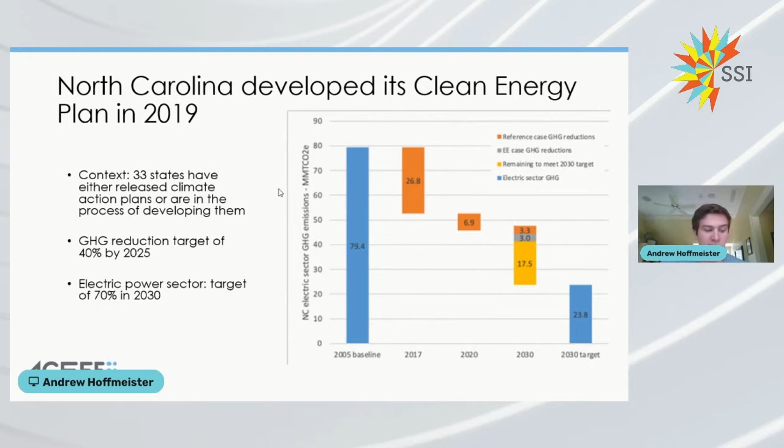So improving energy efficiency in industry is an essential way to advance decarbonization, reduce electricity demand, and provide cost savings to integral parts of state economies. And this is especially important, I'll note, in light of the relatively cheap cost of saved energy in the industrial and commercial sectors and the energy intensity of those sectors. North Carolina industrial customers were responsible for over 27,000 gigawatt hours, or about 20% of North Carolina's electricity consumption in 2018. And those numbers are represented here in Figure 2.

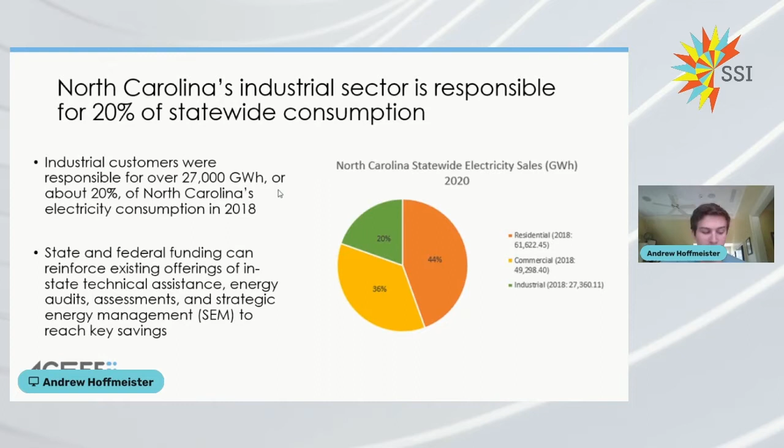Using state and federal funding to leverage existing programs and to reinforce existing offerings of technical assistance, energy audits, assessments, and energy management is essential in maximizing the potential of industrial savings in terms of helping North Carolina and other states reach their climate goals.

So North Carolina utilizes several university, government, and nonprofit programs to provide energy assessments and technical assistance to the industrial sector right now. This includes the Local Industrial Assessment Center, or IAC, at North Carolina State University, nonprofits such as Advanced Energy, and governmental entities, including Waste Reduction Partners and the North Carolina Clean Technology Center.

So the DOE-funded IAC performs energy use assessments for industrial customers and are critical to expanding industrial EE. These centers and their assessments provide industry-specific expertise and help to create a knowledgeable workforce for industrial transitions. They connect small and medium customers with energy savings opportunities, as well as quantify potential energy and cost savings.

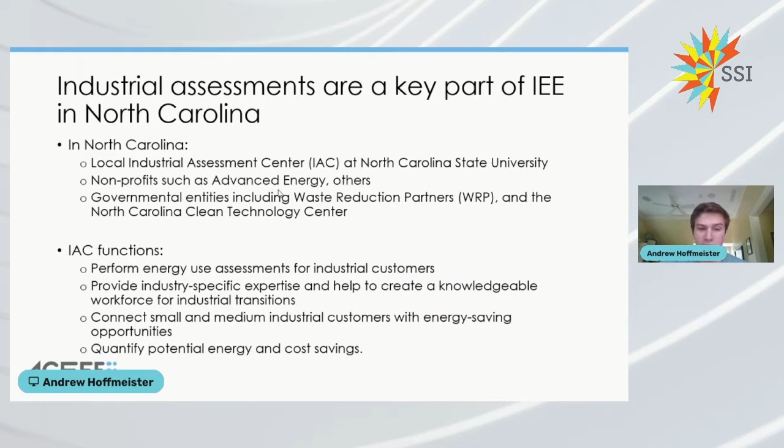So there are opportunities to leverage those benefits of industrial energy assessments through additional state and federal funding on top of the funding that the Department of Energy already provides. So in that state assessment, we calculated that industrial assessments in North Carolina can save over 200 gigawatt hours of electricity in 2040. Since 1992, the NC State IAC has conducted over 500 assessments, implementing over 1,800 voluntary energy efficiency measures and saving almost $25 million.

Since 2012, about 67 recommendations have been implemented each year, with average savings of 124 megawatt hours per recommendation. So along with the other sources of energy assessments, those continuing existing efforts from those other sources would result in about 36 gigawatt hours of savings in 2030 and about 50 gigawatt hours of savings in 2040.

So if North Carolina were to double the current IAC funding, we found that the number of implemented recommendations and resultant savings could also double, reaching 100,000 megawatt hours of savings in 2040. So combined with those existing efforts above, it's possible to reach savings of 176 gigawatt hours in 2030 and 208 gigawatt hours in 2040, or 0.1% of the total electricity load in 2040.

So the NC State IAC could also deliver significant peak savings by helping industrial customers change rate schedules, reduce loads, and shift plant operational schedules. Also, there's the potential for further savings through a new IAC at another major engineering university in North Carolina or nearby, and complementary policies that would operate to reduce industrial energy consumption include support for smart manufacturing and intelligent efficiency,

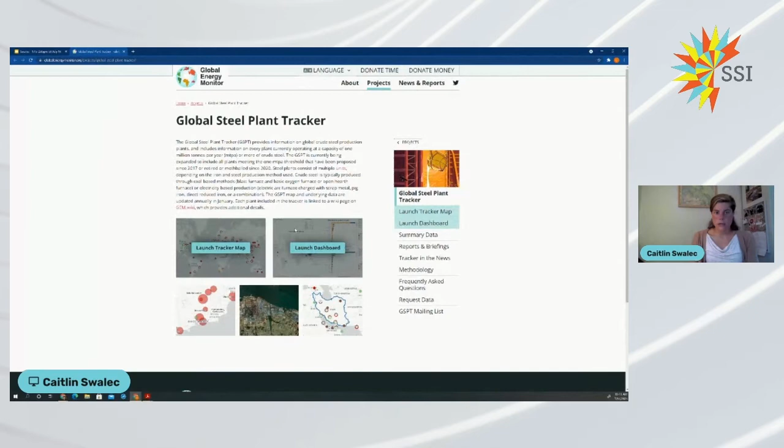So first, we have our online interface, which I'd like to just show quickly. There's two parts here. We have a dashboard that shows some data visualization and a tracker map that has all of the plants located.

And in this capacity view, you can really quickly see some major trends in steel production. And I'll be getting into steel making and why this is relevant in just a moment. The few things to pull out here are, a huge concentration of steel production in China, mostly the blast furnace, basic oxygen furnace route, and that electric arc furnace steelmaking is the predominant form in the US.

So the other pieces of the tracker, we also have a wiki page for each steel plant, which provides background information on the plant. It also provides a lot of detailed information that comes from our underlying database, which is the third piece of the tracker.

And we currently provide data on location, ownership status, or operating status, the capacity and production of the steel plant, the steelmaking process, and then some details on the furnace units at the plant.

And then we have additional data that we don't, it's not quite complete, so we don't release it publicly yet, but it includes information on steel products, sector end users, such as oil and gas, raw material sources, and then we're looking to expand the tracker by including more innovative, low-emission steelmaking projects, workforce data, and information on emissions.

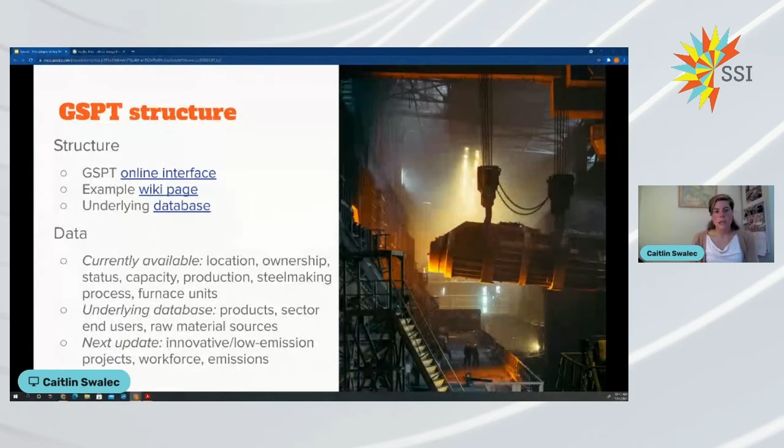So when you're looking at emissions from the steel industry, it really depends on the process. There are three main production routes for steel making, and I'm going to go over these briefly because it's important context for the rest of this discussion.

The first route is the blast furnace basic oxygen furnace steelmaking route. The raw materials are coking coal and iron ore, plus some other things. The coal and iron ore go into the blast furnace unit, or BF, for the iron making phase, creating pig iron—the most emissions intense part of the process. From the blast furnace, the pig iron goes into a basic oxygen furnace where it's made into crude steel. Overall, emissions for this route are approximately 2.2 tons of CO2 per ton of steel.

The next route is direct reduced iron electric arc furnace steelmaking, or DRI-EAF. An important distinction here is that the raw materials are iron ore plus some other things, but you don't have metallurgical coal. That coal creates process emissions in the BF-BOF route, which makes it really hard to decarbonize. BF-BOF is the most common steelmaking method right now—about two thirds of global production uses it.

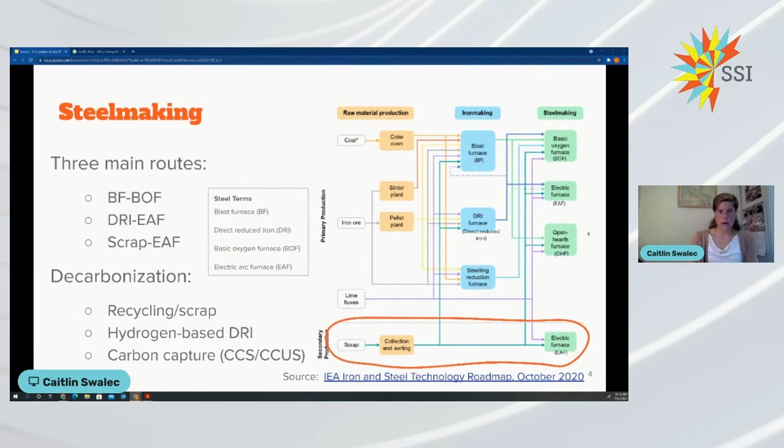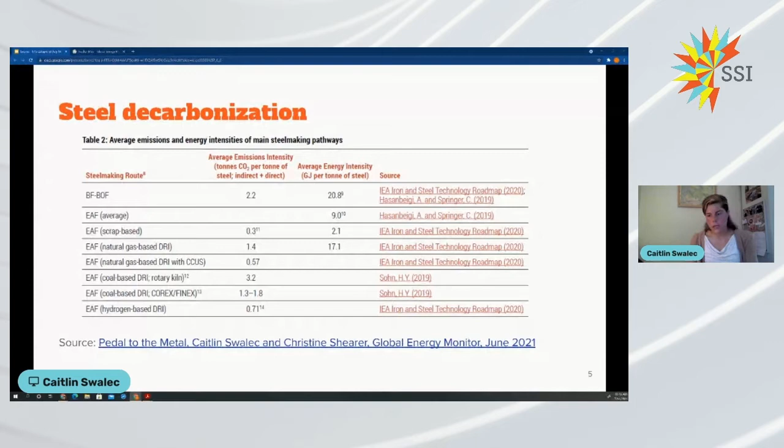So again, here's a table of the emissions intensities for steel production. I just want to emphasize again, most steel right now is made by the blast furnace basic oxygen furnace route. And then the electric arc furnace routes tend to be lower emissions unless you're looking at the coal-based.

So why do we care about this? Well, steel is responsible for 11% of global carbon emissions and 7% of global greenhouse gas emissions. Multiple reports have come out recently showing the pathway that the steel industry could take to reach mid-century net zero targets. And whichever group you're looking at that has come out with these pathways, what's clear is that the steel industry needs to make a shift from how they're currently operating to achieve any of these goals.

And the way that that's going to happen is switching away from the blast furnace basic oxygen furnace steelmaking route, using more of these innovative low emissions technologies like the hydrogen-based DRI and carbon capture storage, increasing scrap recycling, and material efficiency, so smarter design in steel.

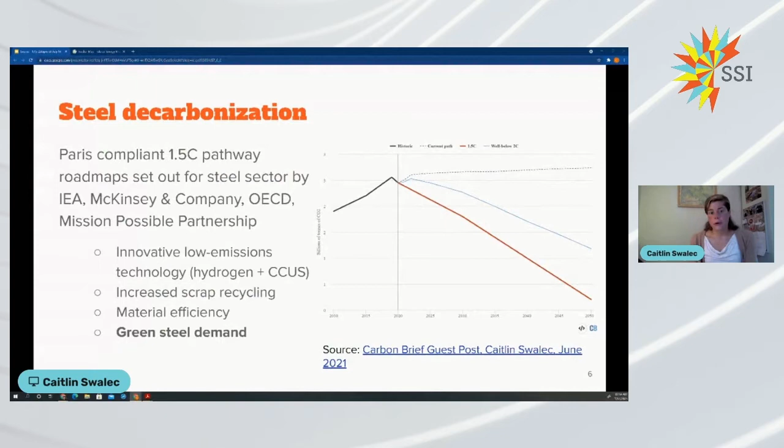And then this transition is going to be driven by green steel demand. Steel plants aren't operating with huge margins of profit, so in order to be making investment decisions to move towards lower emissions steelmaking, there needs to be green steel demand that shows these steel manufacturers that folks will be purchasing this lower emissions steel.

And that's where sectors like the oil and gas industry can come in. So oil and gas infrastructure, steel pipelines are the main material used in gas transmission networks. Crude oil, acidic bearing fluids, and the other petroleum products used in oil and gas are really corrosive and create a lot of thermal stress and structural stress on pipelines. So you need a really strong material like steel.

Although stainless steel is more resistant to corrosion than carbon steel, it's also much more expensive. So carbon steel is the main material used. Now the pipeline market is set to grow by about 6% annually from 2021 to 2026. We are seeing more pressure to move away from oil and gas, so that could change, but I think it's clear that there's a lot of projects in development. I'm going to go through a little bit of that in a moment.

And then there's also a lot of cases where oil and gas pipelines are being repurposed for other uses, for example, the new hydrogen economy. We have over 1,000 kilometers of pipelines being used for hydrogen in the US. In the EU, there's a lot of projects going on to convert oil and gas pipelines for hydrogen transport. They're predicting 23,000 kilometers of pipeline being used for hydrogen by 2040, and about 3/4 of that is repurposed natural gas pipelines. So whatever's happening with the oil and gas infrastructure, we know that pipelines are being built, and that steel demand is coming through.

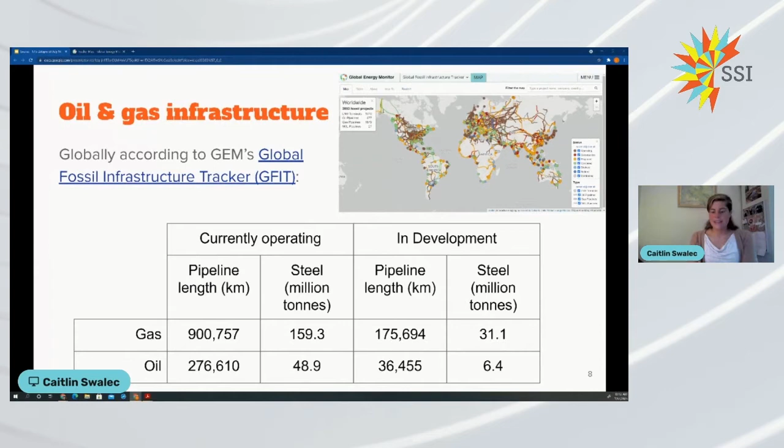According to our infrastructure tracker for oil and gas, we know that there's about 1 million kilometers of gas pipeline currently operating and about 250,000 kilometers of oil pipeline currently operating, and then over 200,000 kilometers of oil and gas pipeline in development right now. And using some standard characteristics of pipeline, that equates to around 37 million tons of steel that will be demanded for these pipelines.

So that's a pretty big amount of steel that could be sourced with conventional methods, or it could be sourced with green steel. So last fall, the World Pipelines Report, which is a technical magazine supporting the oil and gas industry, made this call for the oil and gas industry to support the transition to a low carbon economy by sourcing oil and gas pipelines from carbon neutral steel producers, which is a pretty big call to action for the oil and gas industry and led to a lot of questions for us.

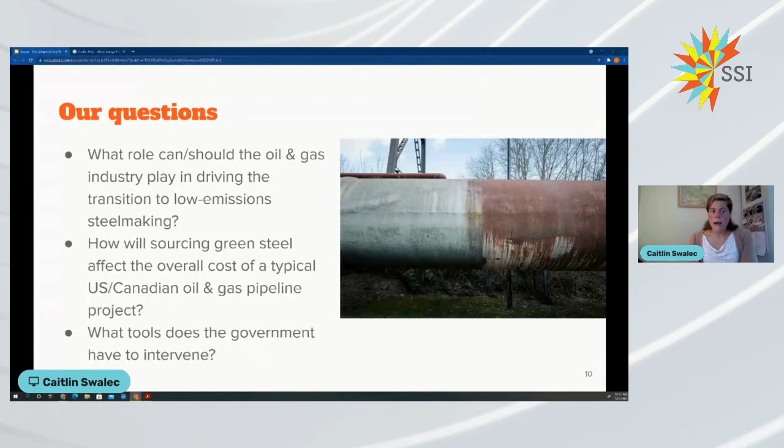Initially you might say this seems like a moonshot, but the IEA Net Zero 2050 report found that oil and gas companies are responding to pressure to invest in clean energy. So I think there's also an opportunity to pressure them to invest in green materials and see them respond. So the main questions we had coming from this report and the status of oil and gas infrastructure are: what role can and should the oil and gas industry play in driving the transition to low emission steelmaking? How will sourcing green steel affect the overall cost of a typical US or Canadian oil and gas pipeline project? And then what tools does the government have to intervene and help support this transition?

So I just want to take a moment first to talk about green steel demand. We know that low emission steel production is essential to meet mid-century climate targets. Embodied carbon emissions are being identified and valued through mechanisms like carbon border taxes and policy levers.

So demand signals from steel buyers are needed to drive the green steel transition. Steel buyers need to cover the green steel premium to drive manufacturers' investment decisions, because steel manufacturers need to know that buyers are committed to buying large quantities of green steel for the long term. And this is important because, as I said before, these low emission steelmaking technologies haven't reached commercial scale yet, but they're set to in the next 5 to 10 years.

And at the same time, steel plants are facing these reinvestment cycles, and most steel plants are going to be making decisions about whether to prolong the units they currently have operating or to replace them with lower emissions steel manufacturing units in the next 5 to 10 years also. So the oil and gas industry could help create this green steel demand, signaling to steel manufacturers that interest and investment in green steel is serious. And that could help drive a big transition in the steelmaking technology currently used.

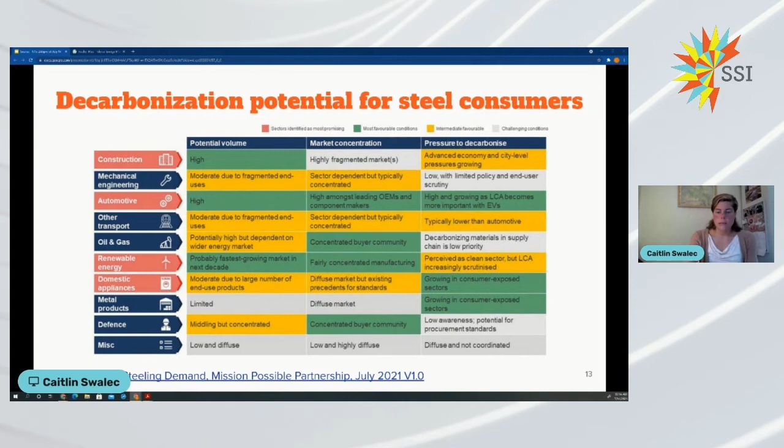Now, we did a little case study looking at the cost that sourcing 100% green steel would add to a typical pipeline project. Using some standard characteristics of steel pipelines used in oil and gas projects, we found that the total cost increase to a pipeline is around 7.5%, or about $75,000 per kilometer. And the carbon dioxide savings for that switch, if you're looking at blast furnace, basic oxygen furnace steel to green steel, would be around 276 tons of carbon per kilometer of pipeline. And the cost of that is about $272 per ton of carbon.

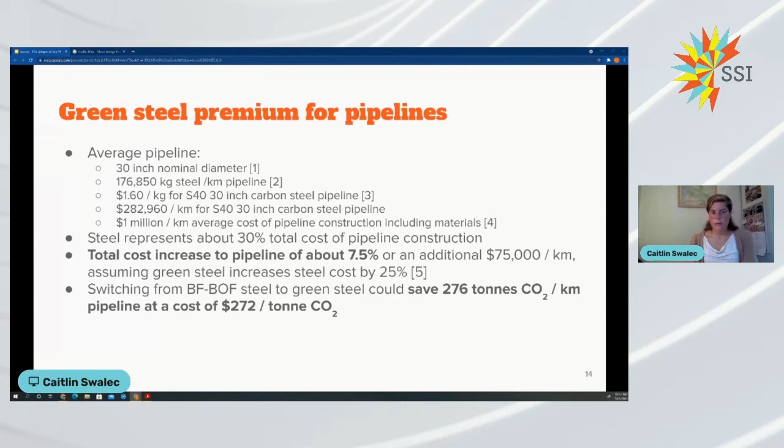So what does that tell us? It means that oil and gas is not going to be making this transition to purchasing green steel on their own. The economic incentive isn't there based on what we see in carbon pricing. So this wasn't an overall shocking result for us, but we still were thinking about ways that the government might be able to get involved and help drive that transition. And there's quite a few options.

One would be to consider embodied emissions in pipeline applications. There's also the potential of using green public procurement policies for state-owned oil and gas pipeline projects. Of course, that's not super relevant for the US or Canada, but there are places where that could make a big difference. There's also the option of setting Scope 3 emission standards under the American Petroleum Institute standards that are used for sizing and safety criteria for pipelines. And then I think there's also a big potential for phasing out oil and gas pipelines by requiring repairs and remanufacturing of corroded steel pipes rather than replacement. So that's really working under the material efficiency umbrella and lowering steel demand.

I also wanted to give this example plant in Canada. It's a blast furnace basic oxygen furnace facility with about 3 million tons of crude steel capacity per annum. This plant primarily produces large diameter pipes for the oil and gas industry. And they recently received around 16 million Canadian dollars from Canada's Strategic Innovation Fund to upgrade the facility. So that was a huge investment in this steel plant, but really an investment in the oil and gas industry. And this money is currently being used to make some improvements to the plant.

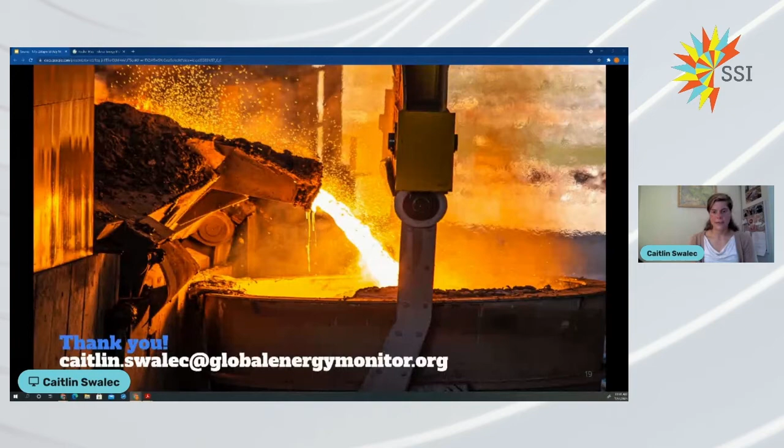We're going to move on to our final presenters. We have two presenters talking to you a little bit about the Shakespearean dilemma of to co-digest or not to co-digest. That is the question of the hour. A little bit about Sabarish Vinod and Kyle Crete.

Sabarish is a director of new product and services at Lincus Inc., where he leads their expansion into new markets and in the design of new offerings. His focus is on driving development of solutions that break down barriers to customer participation in energy efficiency programs. He has provided technical and policy support for energy efficiency and demand response programs as a subject matter expert on complex technologies and system optimizations.

Sabarish has a patent pending on the remote pump monitoring device for oil and water pumps. He holds a bachelor's degree in mechanical engineering from University of Calicut in India, and a master's degree in mechanical engineering from the University of Michigan, Ann Arbor. Kyle is a project manager for the Energy Coalition and is also a mechanical engineer from Cal Poly SLO.

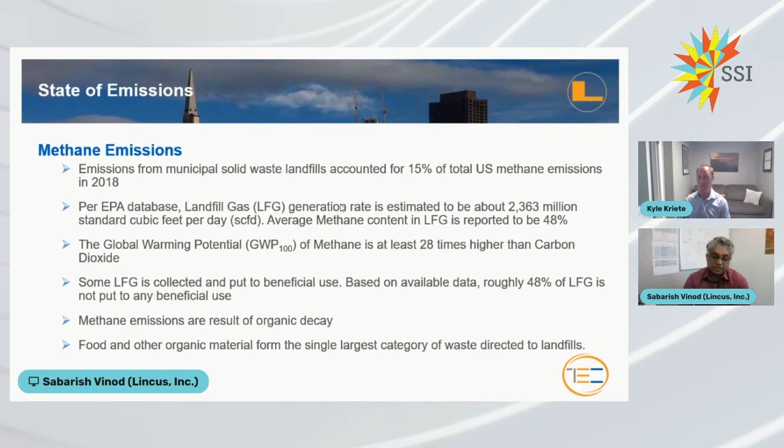And going into the next slide, food and other organic material form the single largest category of waste directed to landfills. So to sum this up, there's a lot of methane that is being generated in landfills. A good portion of that is not being put to any beneficial use. And that methane is the result of organic decay, which comes from organic food and organic material that is being sent to landfills. So what does that look like, right? So how do we characterize this waste?

So organic waste accounted for 24% of all municipal solid waste that was sent to landfills. And industrial, commercial, and institutional customers accounted for more than 75% of this waste generation. This is important to consider because when you have a concentrated group of customers sending this type of waste into a landfill, that means there is an easily addressable problem where you're able to figure out how do we collect this organic waste, how do we process this, how do we make sure that this organic waste is not being dumped in landfills, which results in methane emissions, which has 28 times the global warming potential of carbon dioxide.

Now, here is a table that shows the organic waste here, right? So just looking at these numbers, in the year 2018, this is in 1,000 metric tons, about 63 million tons of waste was generated. And then about 35 million of that was landfilled. So we are talking significant opportunity here in terms of being able to capture this organic waste that is being sent to landfills, which sits there, decays, and produces methane, a large portion of which is not being put to any beneficial use.

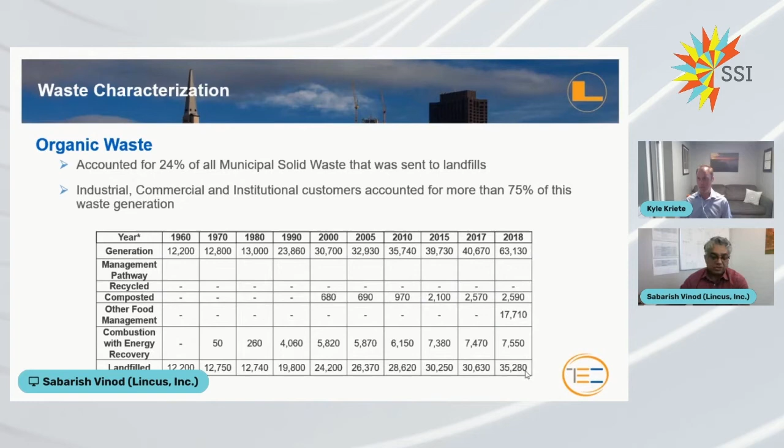So how do we do this, right? When you consider this organic waste and co-digestion, as it was explained earlier, we are figuring out an infrastructure by which we are taking this organic waste and sending it into facilities that are able to collect this waste, process it, and then the resultant higher gas yield can also be put to beneficial use. So naturally, when we were thinking about landfill diversions, we are thinking about wastewater treatment plants that are equipped with anaerobic digesters. Now, there are 14,000 wastewater treatment plants in the US.

We need to figure out how many of them are equipped with anaerobic digesters, because that is one of the requirements for plants to receive organic waste, process it, and then produce biogas as a part of it. So to figure that out, we used available databases. The one that we went to is the Water Environment Federation to locate plants that are equipped with anaerobic digesters.

We collected the data from the Water Environment Federation database, but then, just to make sure that we are using good quality data, we cross-checked that data with the other databases that are available. So in this case, we used the EPA Clean Watersheds Needs Survey database, which is maintained by the EPA, and it contains information regarding wastewater treatment plants and the technologies that they employ. And to discuss some of the data quality checks that we did, I pass this on to Kyle.

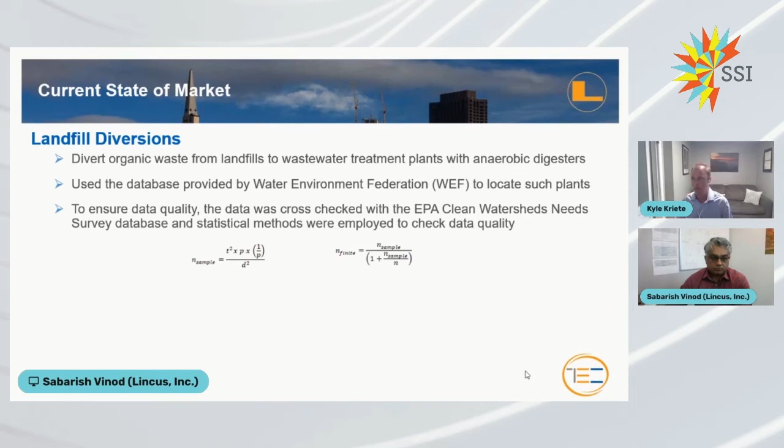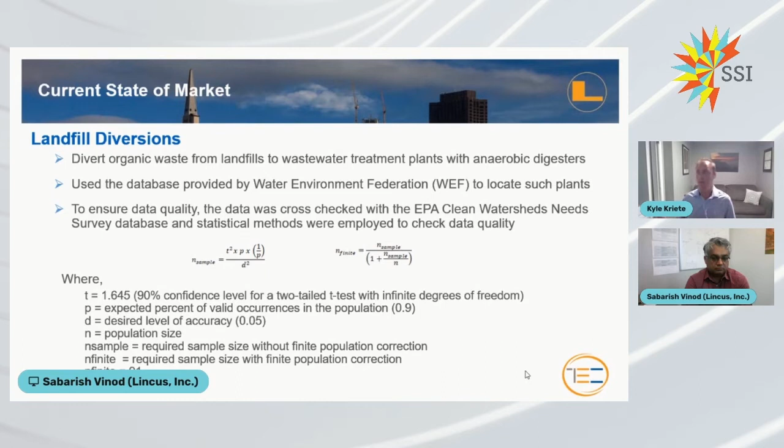And what we found was, these were the numbers that we came up with, and we ran them through these two formulas in order to come up with this magic number of 91 data samples to verify between the two databases, and to cross-reference the two to make sure that we had the right set of data and that it was accurate. So moving to the next slide there.

So looking at our quality control, of the 91 samples, we used a random number generator to make sure that we were being unbiased in our research. So we took 91 random samples from the 1,268 wastewater treatment plants. And we found that 67%, or 61 of the 91, matched perfectly between the two databases. So we were very happy with that. Of that, we found the remaining 30 were inconclusive, and this was for a number of reasons.

So 13 of the entries had an incomplete data set from the Water Environment Federation, so we were able to cross-reference in the EPA's database to get those numbers as well. Now, 11 of those had incomplete data from the EPA, so there was not too much we could do about that. And finally, the remaining 6 were just missing some data from both entries, and it was usually one or the other. We were primarily concerned with average daily flow versus design flow.

So with several of these, the EPA may have had a permitted flow rate or design flow rate, but it was missing the average daily flow. So we had to combine the two in order to really find the most accurate data that we use. So that was a little bit behind the scenes and what our thinking was going through this.

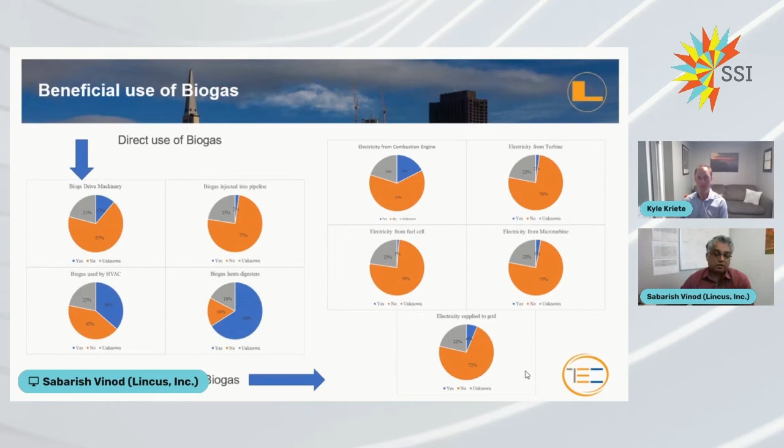And from these graphs, you can see that more of these charts are the color orange, which means that there is not much beneficial use going on. So it's not that common, right? Beneficial use of biogas, even with plants that are equipped with anaerobic digesters creating biogas using domestic waste, is not that common. And production of electricity using biogas is not that common either. So there are a lot of considerations when you look into why that is the case, right?

So some of the things that we came up with is that in a large part of the country, the electric and the natural gas rates are not that significant, right? So it doesn't justify the investment required for additional equipment that is required to treat, process, and put the biogas to beneficial use.

So electricity and gas rates, and we'll go into this a little bit later, because the payback on the investment is being justified using offsetting electric use or gas use at these plants. And total biogas yield is also a factor there.

So based on the analysis that we completed, a plant that is treating about 20 million gallons per day is the sweet spot where plants can invest in equipment that will take the biogas, treat it, and put it to beneficial use. And not a lot of plants meet that criteria.

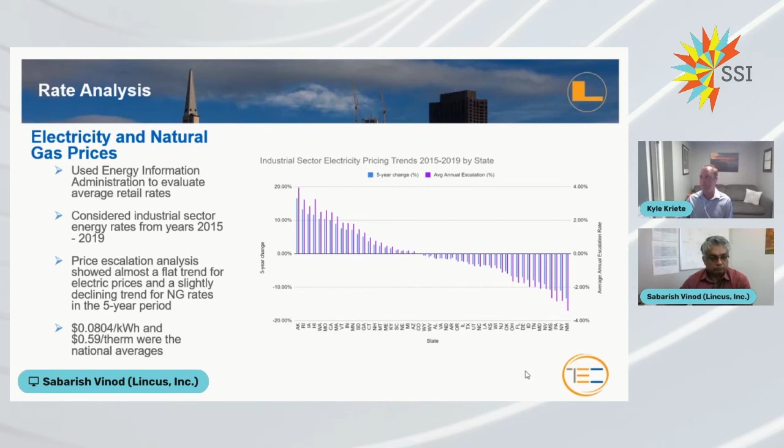Thank you. So with that background, what co-digestion is, where we are looking to implement co-digestion, and some of the governing factors that will determine the success or the failure of co-digestion, we looked at 3 different scenarios, 3 approaches. Because each wastewater plant is unique, they have their own requirements, their own equipment, their own infrastructure.

So what we did was we looked at a representative project that we did in California. And using that project as our basis, we evaluated the scenarios, right? So approach 1 that we looked at is a conservative outlook, assuming a 35% success rate.

So based on the capacity of the equipment installed, the plant is only seeing the equipment operate at 35% capacity. This means the plant is not actively pursuing organic waste; it's a passive approach where they are talking to their community to get as much organic waste sent to the plant as possible.

The second approach is a little more aggressive on the plant side, operating at 67% capacity. This could mean the plant is actively working with local restaurants to figure out what they're doing with their fat, oil, and grease, or talking to the ag community about their organic waste.

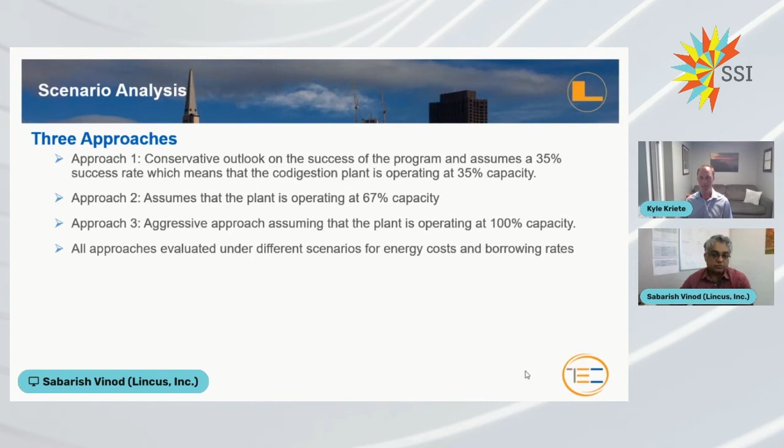All these approaches were evaluated under different scenarios for energy cost and borrowing rates. To normalize the analysis across different plant types, we came up with a benefit-to-cost ratio rather than using simple payback, because simple payback may not make sense for comparing different plants.

Benefit to cost ratio, for the purpose of this paper and presentation, is defined as the net present value of the co-digestion project over its life divided by the initial cost. We assumed the project life is 30 years, and the initial cost is derived from our representative project, using some standard cost guidance for estimating total capital cost required to implement co-digestion.

One thing I'll say here is that we are not trying to estimate the size of the market. The cost should be considered concept screening. Costs and benefits will be highly site specific and should be independently evaluated for each site.

Now getting into the economic analysis. As mentioned, we are using a representative project to estimate benefit and cost. Cost considerations are based on the EPA Food Water Biogas Economic Model, which goes into detail regarding what type of equipment is required depending on the size of the plant and the scope of the co-digestion project, allowing us to estimate an approximate cost to implement co-digestion at the facility.

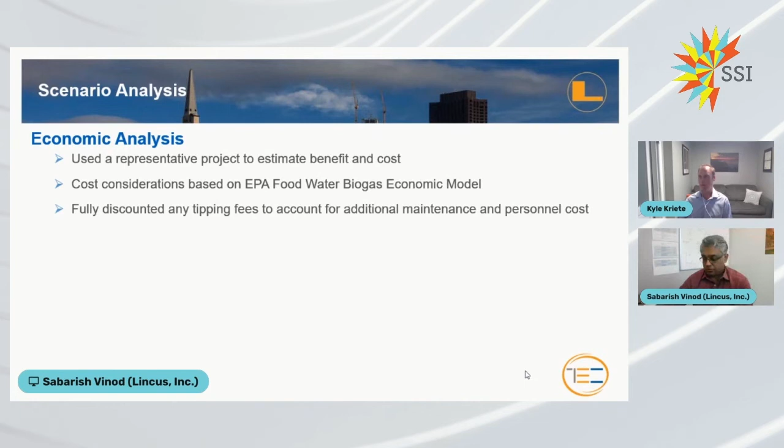We then fully discounted any tipping fees to account for additional maintenance and personnel costs. One of the things with co-digestion is that it's another revenue stream for wastewater agencies, because as organic waste is trucked into the facility, these agencies can charge tipping fees. We discounted that because once this equipment is in place, they'll have to hire additional personnel, make sure it's maintained properly, and pay salary for that additional personnel. So to account for all those extra costs, we discounted it.

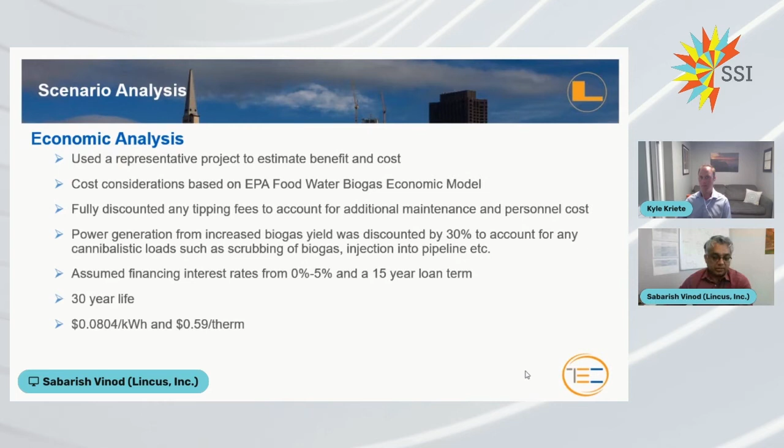We further discounted the power generation by 30% to account for cannibalistic loads, such as scrubbing the biogas to meet pipeline standards and equipment required to inject the cleaned biogas into the pipeline. We then assumed a financing rate from 0% to 5% and a 15-year loan term, using a 30-year life for the equipment to estimate net present value. As Kyle pointed out earlier, we used national averages estimated from EIA information.

Okay, so coming to the results. If you are using biogas for power generation and heating, this is like a combined heat and power type of scenario.

We found that approach 1 is not cost effective under any scenario. Approach 1, if you remember, is the least aggressive, a very passive approach by the agency, where they are taking what is being delivered into the facility and not actively sourcing out organic matter for co-digestion. As a result, there is not much additional biogas yield being produced, and because the benefit comes from the additional biogas derived, approach 1 does not see any benefit.

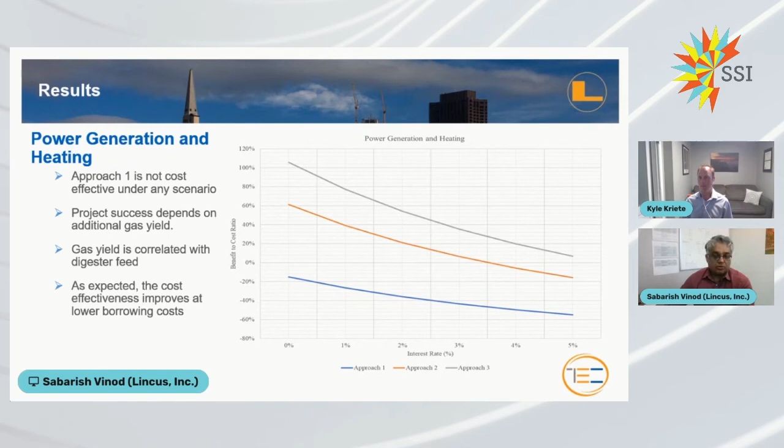To look at other scenarios, we also evaluated renewable natural gas. So what is renewable natural gas? It's where the biogas is being cleaned to utility standards and injected into the natural gas pipeline. In this scenario, there is no power generation, so the cost of power equipment is discounted for this analysis.

And then approach 1 is only economical in 2 permutations, low interest rates and high energy rates. It became economical because the cost of power equipment was discounted. So it's only economical in 2 permutations, so we are not even considering that. Because we are talking about natural gas, energy costs were considered for gas only, and energy rates for gas from 59 cents per therm to 80 cents per therm were considered.

So here are the results. Approach 2 is the slightly more aggressive approach, where they are making sure the equipment is operating at least at 67% capacity. As you can see, even in this situation, at higher borrowing cost rates, some of these scenarios are still not cost effective. And in approach 3, a very aggressive approach, where they make sure the plant is operating at 100% capacity, then it becomes cost effective under these various scenarios.

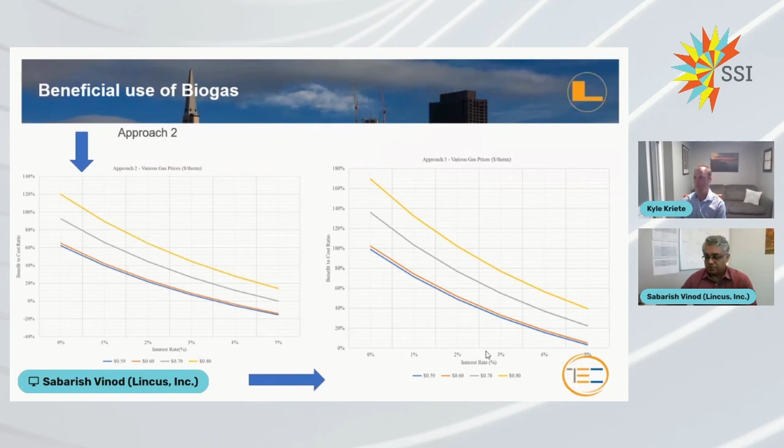So what does this all mean? Getting to the conclusion: co-digestion is a promising and achievable solution for addressing emissions from landfills. There is a certain science that has already been investigated. People understand this, but it is not that commonly used.

Barriers exist in terms of available technology. Trained personnel is a big barrier, because they need to hire people that are trained and able to maintain the specialized equipment. Proximity to landfills, available capacity in existing wastewater treatment plants - if they are operating their digesters at capacity right now, then there is no way we can send additional organic matter.

That means they probably have to add additional digesters, which increases cost. Flat trends in energy prices and relatively low energy prices make it harder to justify co-digestion projects unless strategies are put in place to ensure high levels of capacity utilization. Also, source separation of organics - making sure the organics delivered into the plant are free from debris and foreign material, so it's something the plant can directly use within their process.